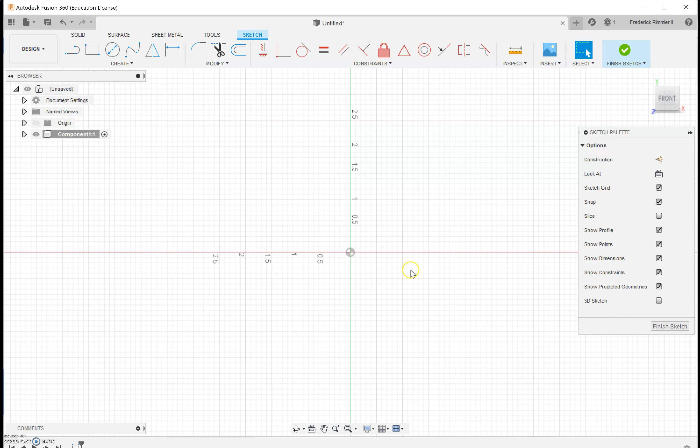So we're going to draw the top half of this rubber handle sleeve. I'm going to go to line, draw out my rough shape. Again, only drawing the top half of that handle sleeve.

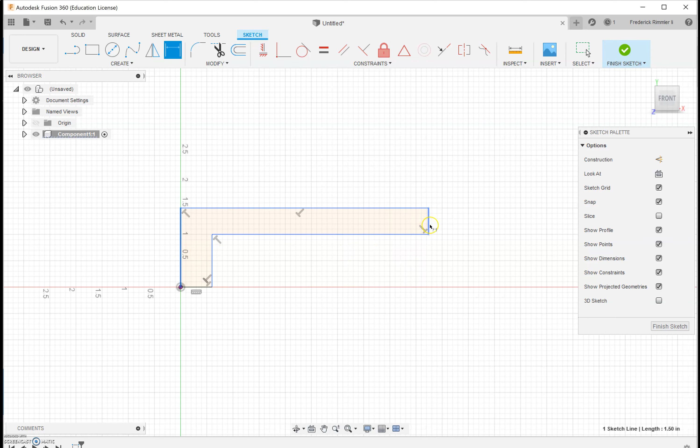Now I'm going to add some dimensions. My overall width is 4.469 inches. The width of this inside handle here is 0.156 inches. I can see that the thickness of this top part is 0.25 inches. And finally, I can see that my outer diameter is 1.375.

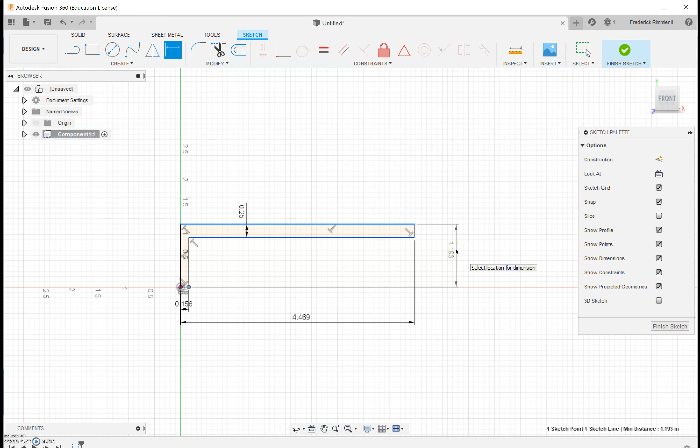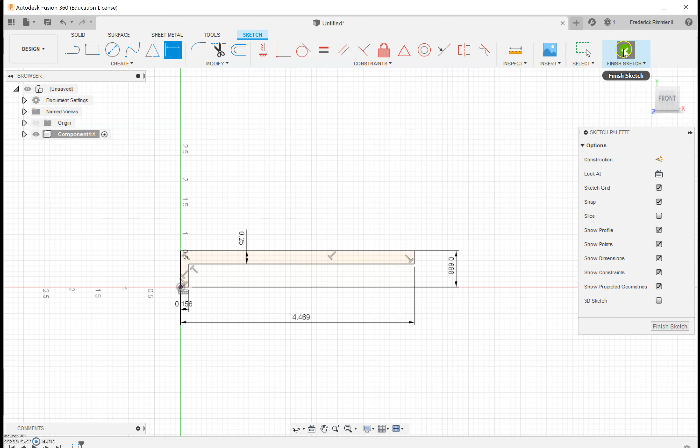That's that diameter, 1.375 OD. But that diameter is the distance all the way across the handle sleeve. Because we're only drawing half the handle sleeve, we need to do 1.375 divided by 2. And this is where Fusion 360 having the built-in calculator is really nice, because now we don't need to do the math. I'm going to finish our sketch, and then I'm going to come up here to the Create panel

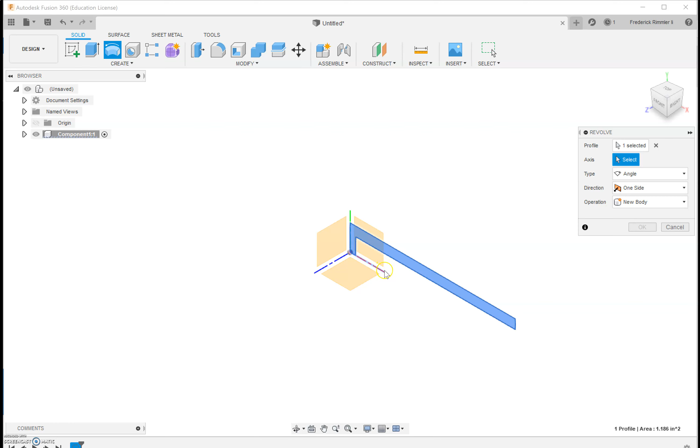and click Revolve. When I do, you can see it says Profile, one selected, because there's only one shape, and it's asking me to select an axis. So that's what we want the middle of our rotation to be. I'm going to pick that guy right there, and now we're good. So a couple pieces of cleanup.

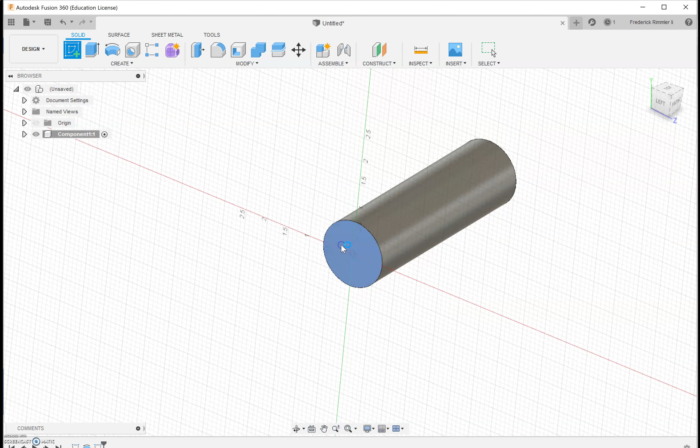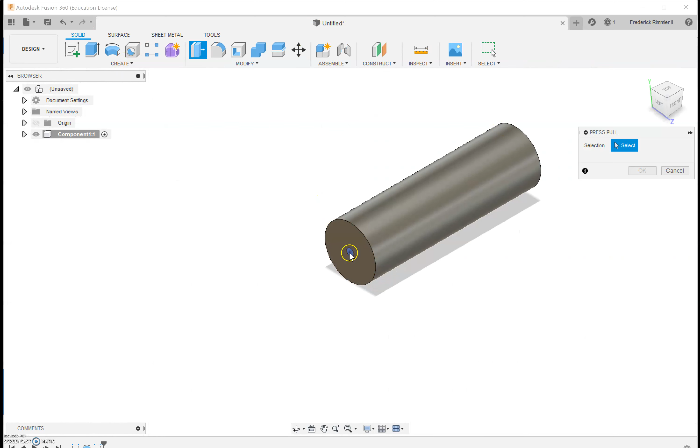First, there is an air vent on this side of the handle so that when you put it on or take it off the bar, air can escape. It doesn't make like a little balloon. So I'm going to create a new sketch and do center diameter circle. Can you go right here? And that has a diameter of 0.1875 inches. Finish. And I'm just going to press pull tool that guy through to make him a cut.

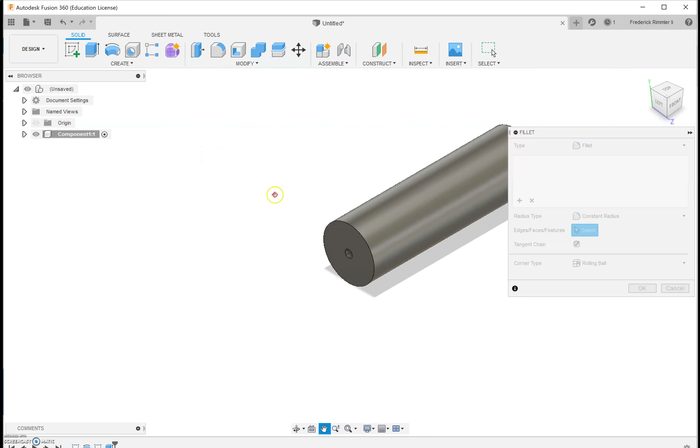Looks good. Now we also want to round off the edges. Those rounded edges are called fillets, and that's up here in the Modify panel. So I'm going to click Fillet. I'm going to click the edges that I want to round off and enter in my radius. My radius is 0.25 inches. And there we go. Finally, it does say that this is a rubber handle sleeve.

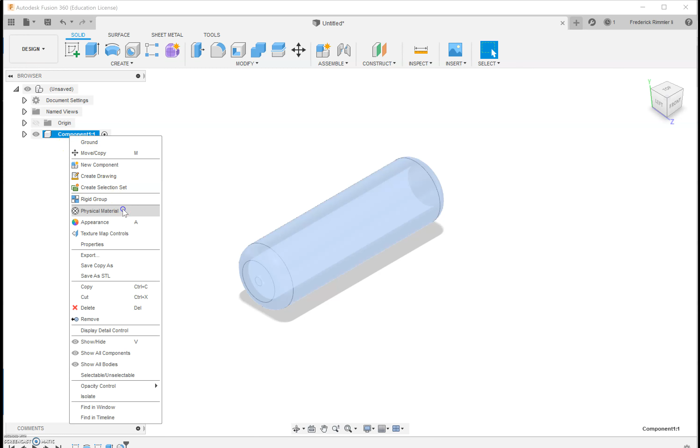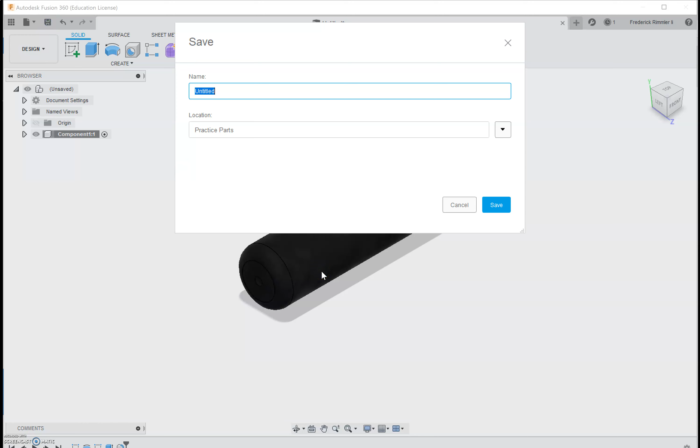So I'm going to right click on my component, go to Physical Material, and in the plastic folder, I can scroll down and find rubber as our material. I'm going to click and drag it over. Simple as that. We're done, and I'll save this as rubber handle sleeve.

The next part with the Revolve tool is the Automoblox axle. And this one can look intimidating because there's a lot of dimensions, but it's really not that bad once you get into a rhythm. As usual, I'm going to start with new component and create a new sketch.

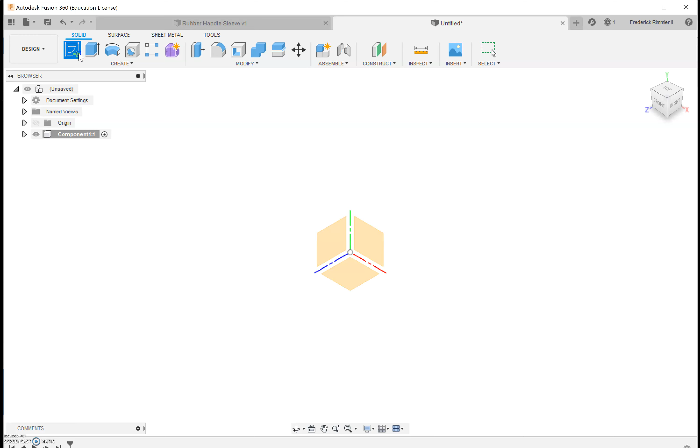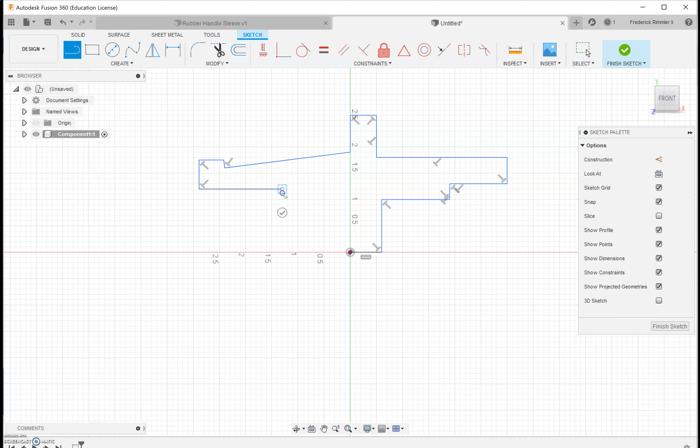I'm going to draw out my rough shape. Remembering that right here, it angles down. And there we go. Now, before we get started adding dimensions, I want to go over one or two quick things. First is I intentionally made a mistake right here.

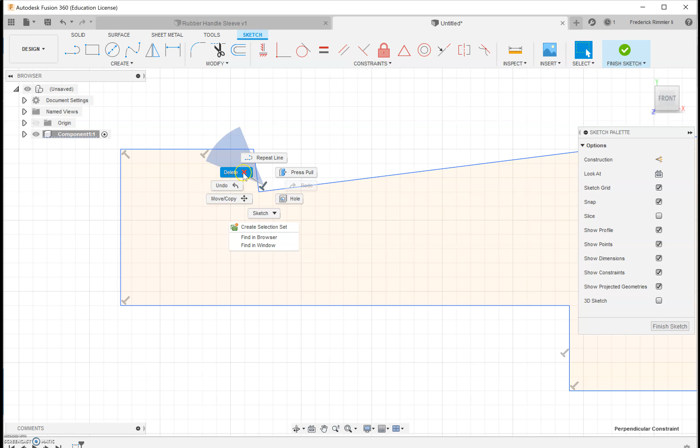When you are going through and drawing out this shape, because this is such a narrow angle, if you draw just a short line going up, it'll actually make that line perpendicular to the angled piece as opposed to straight up and down, which is what we want. So what I'm going to do is I'm going to right click on this perpendicular symbol here, click delete. Now I can go through and add a vertical constraint and make that line run straight up and down.

The other trick that I want to do before dimensioning, and this will help in the future, is this bottom line here and this top line here need to line up. But as you can see, I can click and drag that back and forth. So I'm going to come up here to my constraints panel and pick collinear. That's going to line up two lines, and I'm going to say, hey, that top line, this bottom line, click them and make them collinear. And now I try and click and drag, he won't move.

And trust me, that'll be helpful in the future to do that now before you start adding your dimensions. So I'm going to go to select dimension, and we want to be methodical about this. There's a whole lot of dimensions and we need to make sure we don't miss any. So I'm going to start with all of my vertical dimensions first.

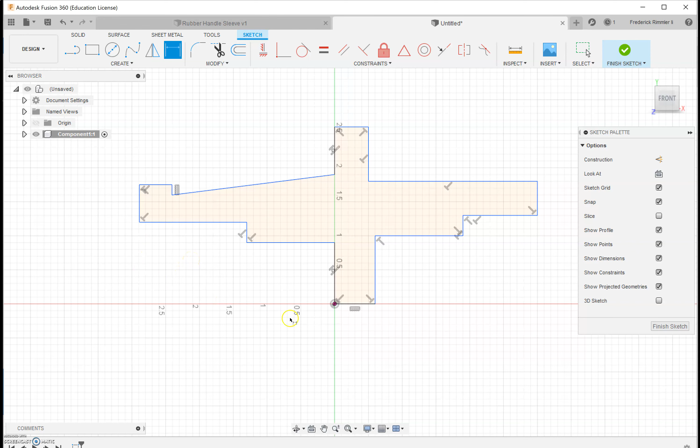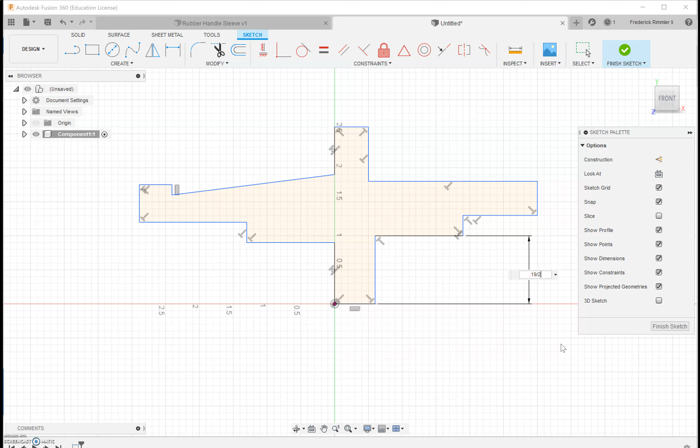Let's start from the middle to the right here on the paper. It says that has a diameter of 0.19, from the top of the part to the bottom. Because I'm only drawing the top half, I'm going to dimension it as 0.19 divided by 2. You can see it shrinks my part down, and now I can keep going.

From my middle to this guy, on the paper it says 0.25, so this is going to be 0.25 divided by 2. My third vertical dimension on this side is 0.29. Because I'm only drawing the top half, that's 0.29 divided by 2.

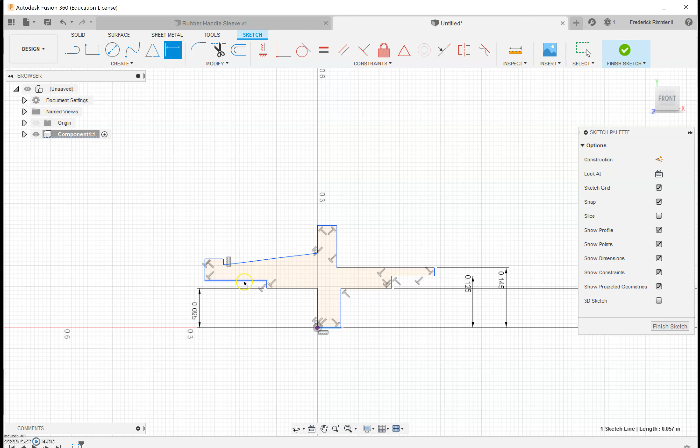On the left side of the sketch, this height right here has a diameter of 0.19, which means it's going to be 0.19 divided by 2 since I'm only drawing the top half. The 0.25 right here will also divide by 2.

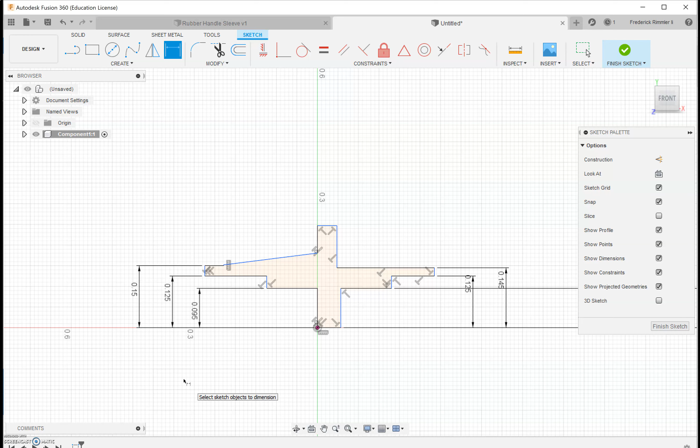To the top of this little edge has a diameter of 0.30, so 0.30 divided by 2. And finally, my overall height has a diameter of 0.40, so 0.4 divided by 2.

Now let's see, that dropped this angled part down, so I'm going to press escape to get out of dimension mode, and I'm just going to redraw him down so that when I add my dimensions, it doesn't get locked up top.

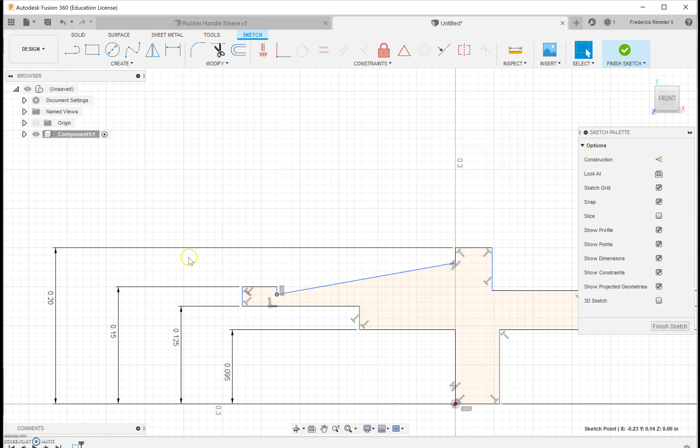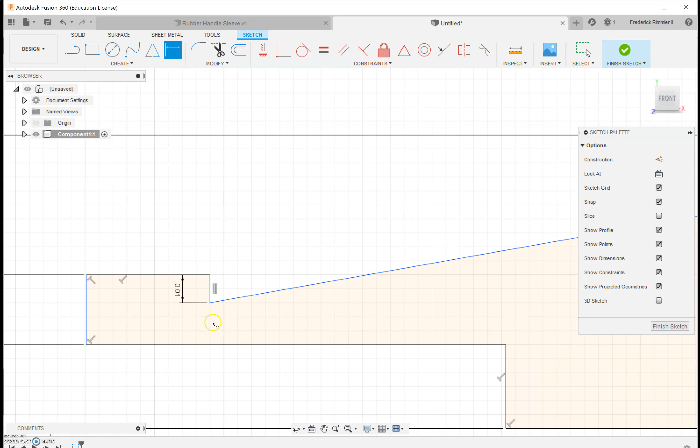Looking at our drawing file, there is one more set of vertical dimensions, and that has to do with this angled line itself. It's very small, but this tiny little shelf here is going to be 0.01 inches. And from the bottom of the angle to the top point of the angle is also going to be a height of 0.01 inches. It's a very slight angle.

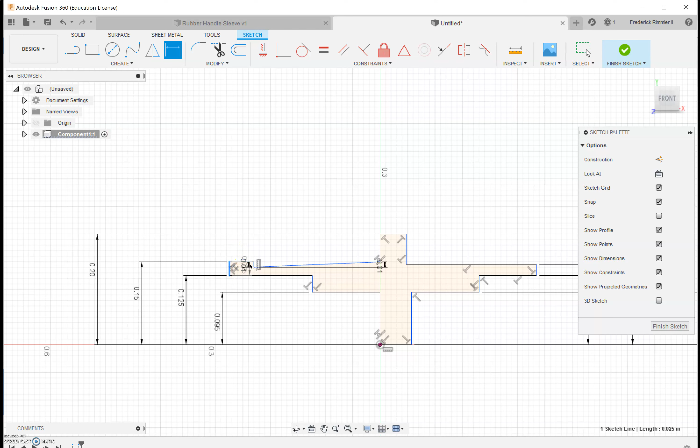Now that I have all my vertical dimensions done, let's add our horizontal dimensions. This first step here is 0.05. Then from this edge right here, looks like it's 0.25. Right in here is 0.19.

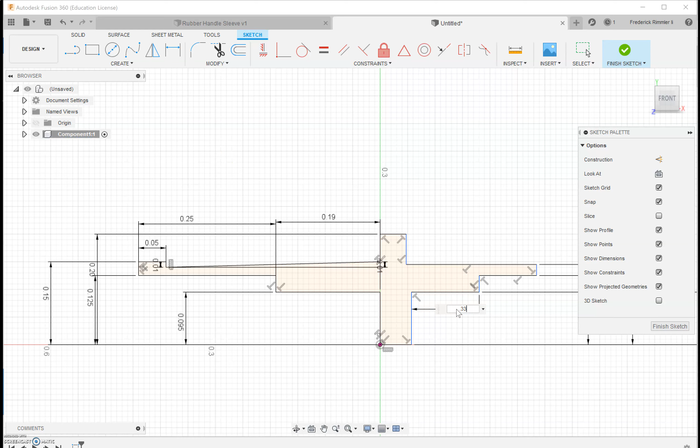Continuing across to this one right here, 0.33 inches. Oh, you can see that sort of pushed the bottom out, so I'm going to press escape and redraw him. I'm going to stretch him out just a little.

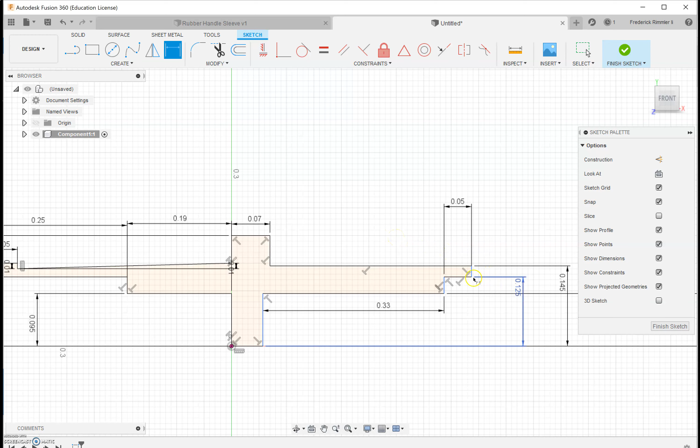Now this dimension right here is 0.05. My middle dimension right here is 0.07. And finally, my overall width from my right all the way over to my left is 0.88 inches.

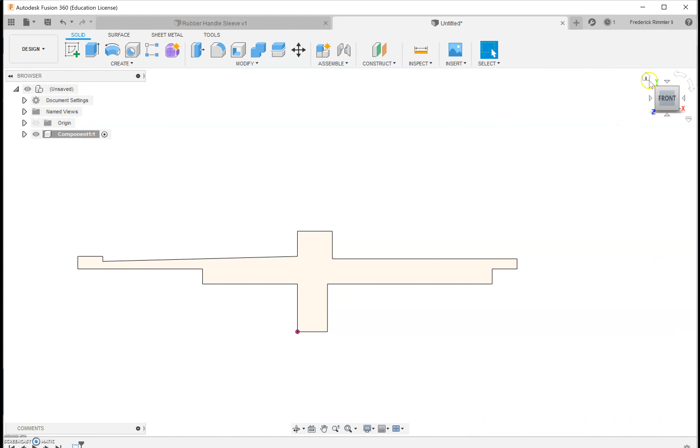Now, as long as we didn't miss anything, all of our lines should be black, which they are. That means we're fully constrained. We can finish our sketch, go to an isometric view, and I'm going to click Revolve. I'll pick this middle line, and now we have our axle connector.

There is one more component we're going to add, and that is a little notch that's cut into the side here to allow the axle to contract and expand when you connect the part. So I'm going to create a new sketch, and I'm going to click it on the side here.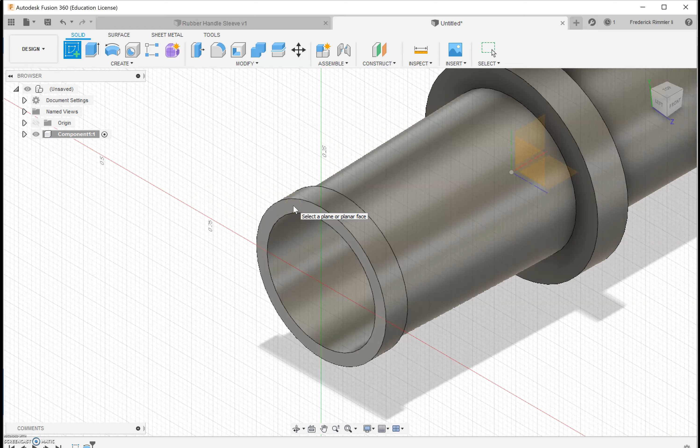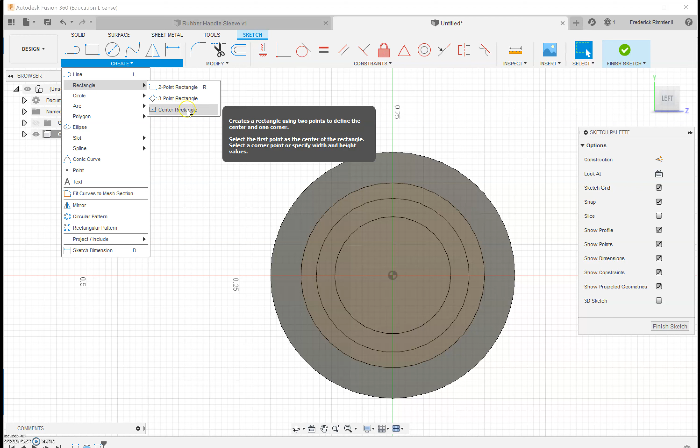Now I want to draw a rectangle to cut this shape out, but I want to make sure that rectangle is right in the middle. So I'm actually going to click the arrow next to Create on the Create panel, and you can see we've got a couple different types of rectangles. I'm going to use Center Rectangle, which lets me start at the middle, and now when I draw the rectangle, it expands out from the middle, staying centered.

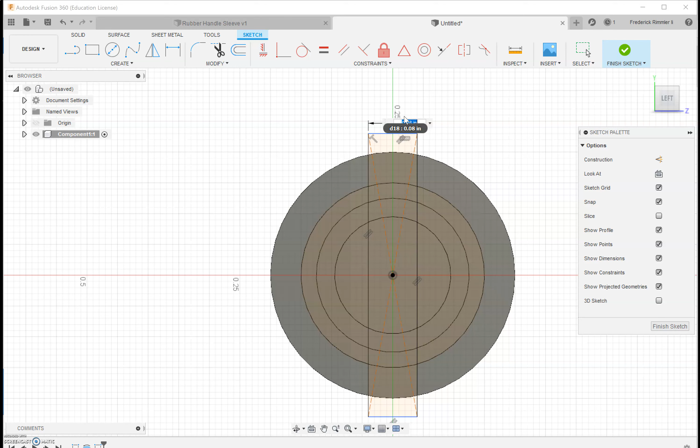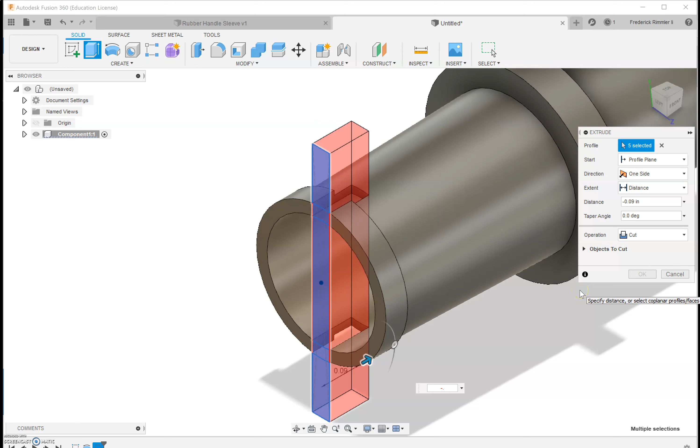Let's see, I'm going to make him 0.08 inches wide. And the height doesn't matter as long as it's taller than the part because we're just cutting material away. Finish sketch. I'm going to come to my press pull tool. Make sure to select the whole rectangle. And then I'm going to click and drag him in negative 0.09 inches to cut away that material.

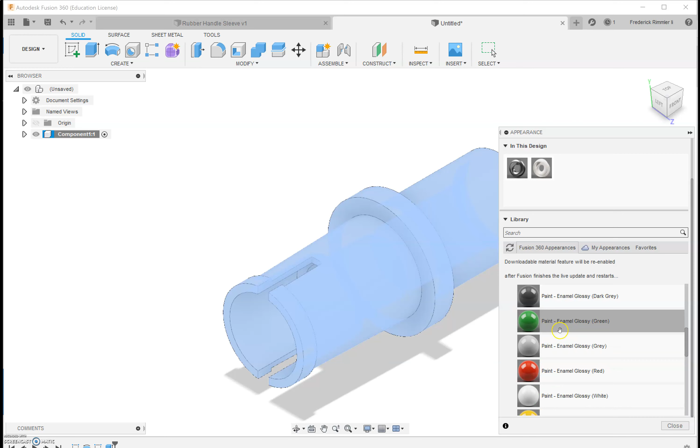Finally, the Automoblox cars do have plastic connectors, so I'm going to go to my physical material here, and we'll just go with ABS plastic. I'll change my appearance, let's give them some paint. Or let's see, plastic - oh, they just have white. So we'll go with paint, glossy, make them green. Why not? And those are our first two Revolve tools.